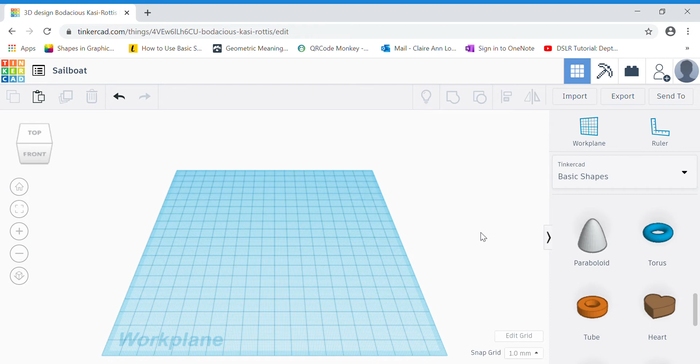Let's get started. First, I'm going to pull out a paraboloid shape. Change the dimensions, we're going to stretch it a bit wider: 30 for the short width and 60 for the length. The height is currently 20, and I'm going to keep that.

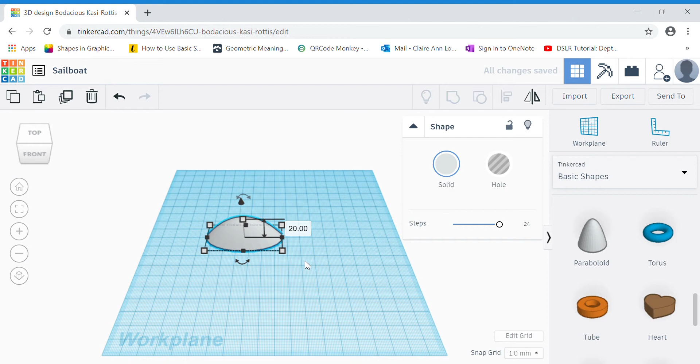What's next is I'm going to flip this shape upside down using my mirror tool. Click the floating arrow, flip upside down. You should see a shape that looks like this. Now this is going to be the hull of our boat, but the bottom is a bit rounded and I'm going to cut it flat.

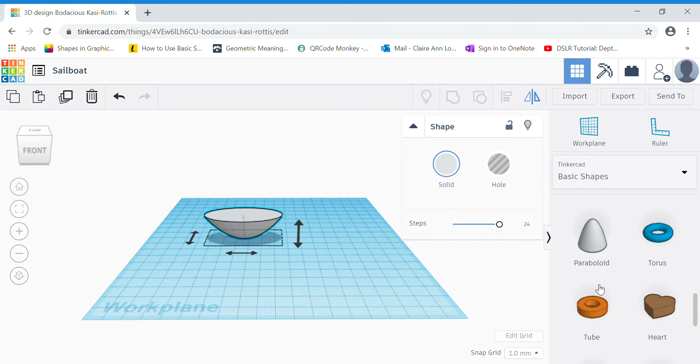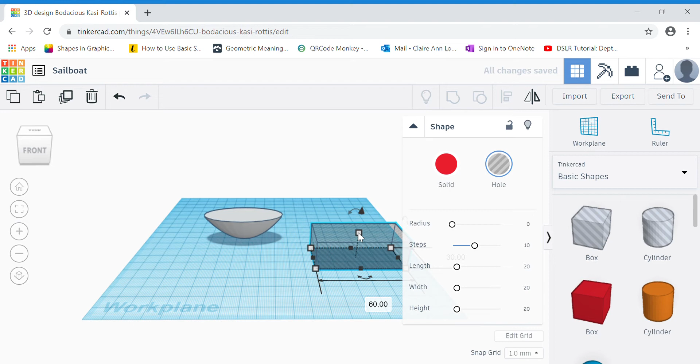To do this, I'm going to pull out a box that is a hole, and change the dimensions for this box. Click the white corner square. I'm going to match that of the paraboloid: short side is 30, long side is 60. But I'm going to make the height a bit shorter, this will be about 5. This is going to be at the bottom of our boat.

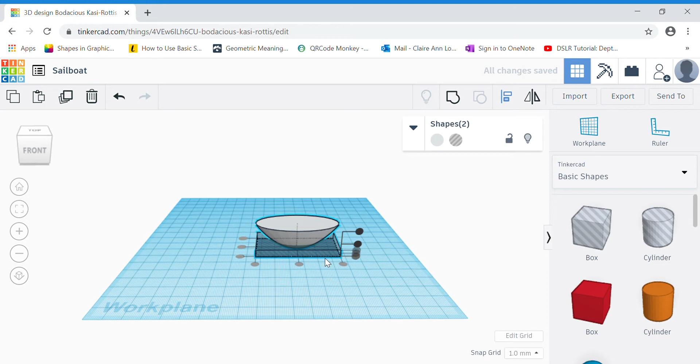Let's align the two shapes together. Drag over, align, middle dot at the side. Your paraboloid should be sitting in the middle of your hole box. Once you're done, immediately do a group, and then you will have cut off the bottom of your paraboloid to get this shape.

As you can see now, our cut paraboloid is floating. We don't want that. We're going to push it using the black cone back to the work plane. This will be a height of 0.

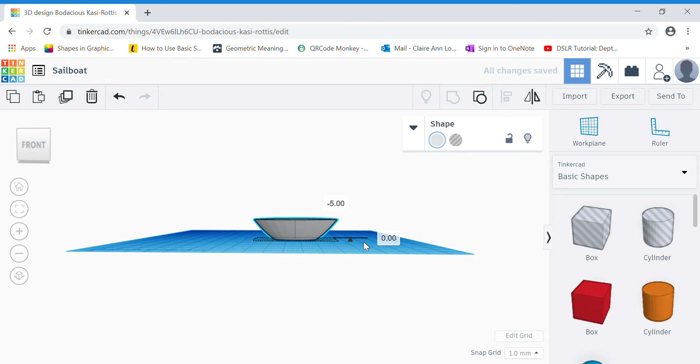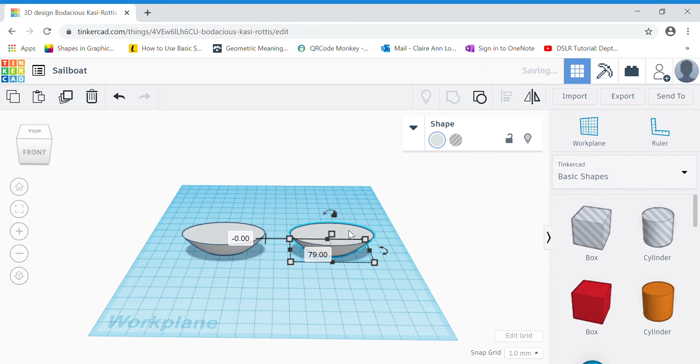Now let's get started to cut out the hole inside our boat hull. For this, I'm just going to shift the paraboloid to the side. I'm going to duplicate this shape and make a smaller paraboloid. Duplicate. You can drag out this paraboloid that's copied. Let's make this one a bit smaller because we're going to cut out a hole.

Dimensions: short side 28, long side 58. The height, I'm going to make it even smaller. Now it's been changed to 15 because we cut off 5 just now. Let's make it 14. Now I'm going to cut this shape into half.

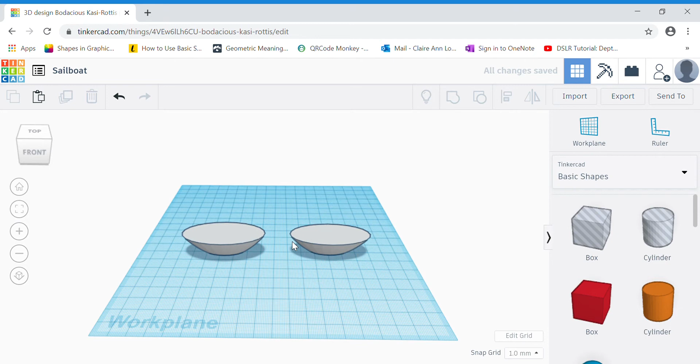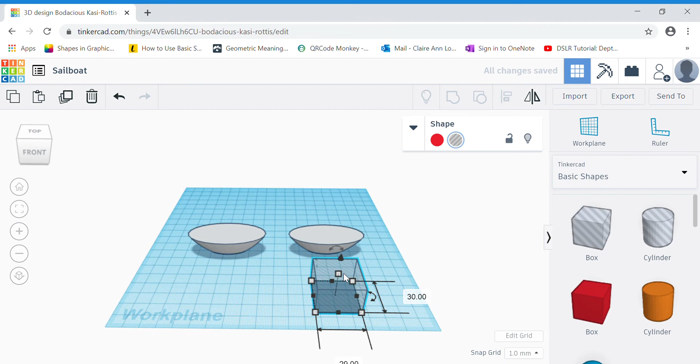So how I do that is I'm going to use another hole box. Change the dimensions, we're going to make this about half of this. The width, let's do about 30. Actually it doesn't matter. The other side we'll do about 29 - it could be 30 as well, so no problem. The height, let's do it a bit taller than the small paraboloid: 15. Now I'm going to push this into half of this paraboloid.

So how I do that is to align both shapes. Align. Instead of pressing the middle dot, I'm going to press the side dot. Click the side dot, now I press the middle dot at the side. I should get something like this. I'm going to cut half of the paraboloid. Once you're done, group.

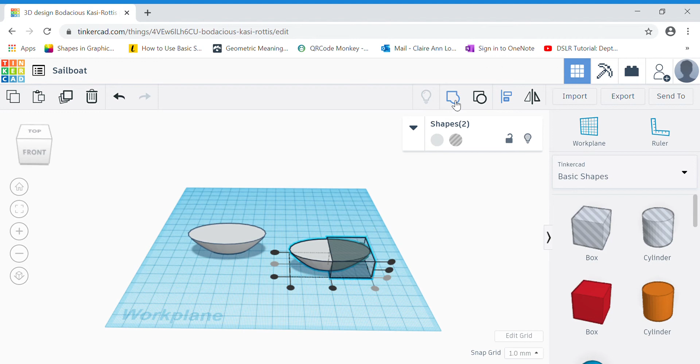When you click your work plane, you should see half of this. Now we're going to change this into a hole. Remember this parabola is smaller, it is not as tall as the previous one - it's about 1 mm difference in height.

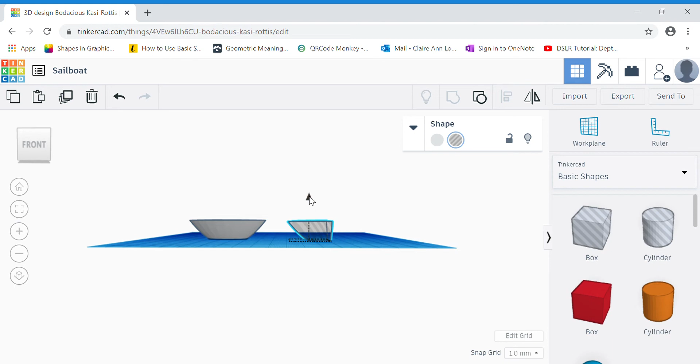So we're going to use the black cone, raise it up to the remaining 1 mm. Now that you're done, use your arrow keys to slowly shift it into the other paraboloid. Make sure it rests right in the middle, like this. Make sure it doesn't pop out of the shape.

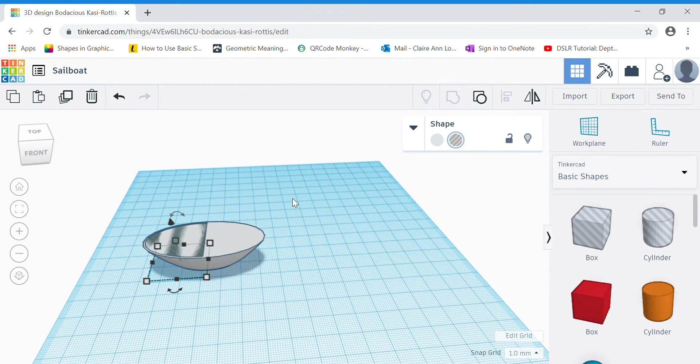Once you're happy with it, select both shapes, do a group. After you wait a while, you should see a very nice hole that's cut into your parabola. This is the completed boat hull. Let's move on to the pole or the mast - for this, you need a cylinder.

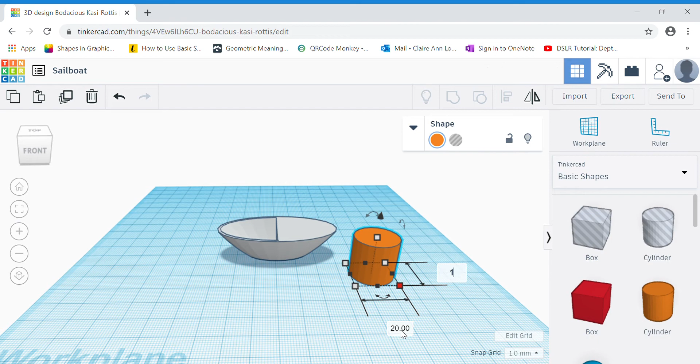Okay, change the dimensions. We are going to make a thin one, so that will be 1 by 1. Okay, height, let's change it a bit longer. We're going to do 70.

Okay, at this point in time, if you want, you can change the shape color. So I'm going to change to a brown. It's up to you what color you want.

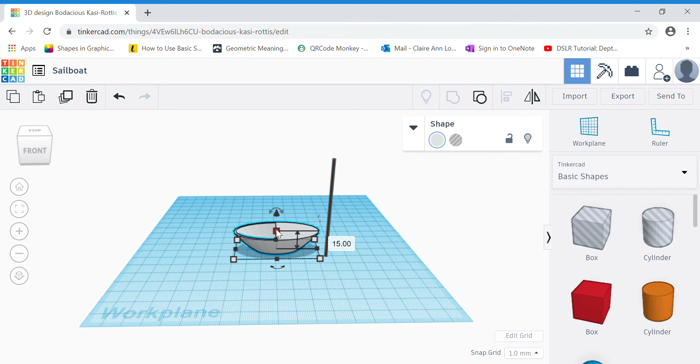Okay, I'm going to put the mast on top of this shape. So this shape is currently sitting at 15mm, so my mast is going to be raised. Use the black cone, raise it to 15 as well.

Okay, then using your arrow keys, just slowly shift it to the center of your boat hull. Make sure it's nicely put in the center. You have to change your view to check.

Okay, now I'm going to do a horizontal boom. So for this, I'm going to use the same cylinder. Duplicate. Alright, my copied shape is already here.

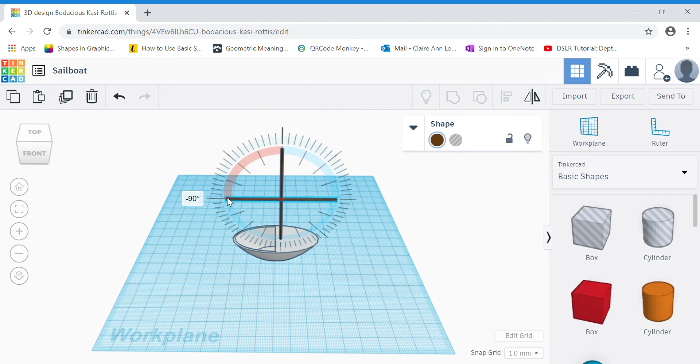I'm going to rotate this way by 90 degrees. Okay, and then I got a really long boom. I don't want that, I just want half. Click the white corner dot, halve it to 35.

Okay, so you should get a very nice half boom here. Now this is a bit tall. We're going to put our sail on top of it.

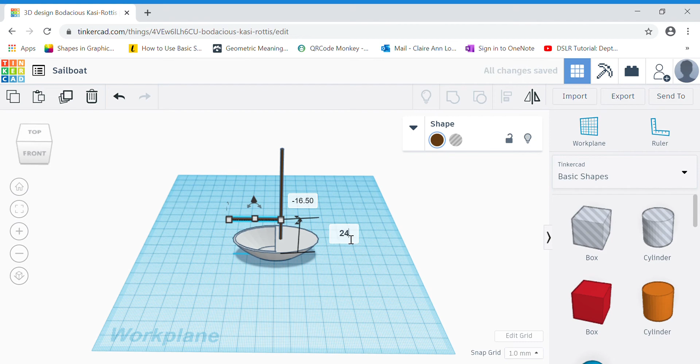So let's push it down to about 24mm high. Okay, so it's going to be a bit lower, so that on top of this we can rest our sail.

Okay, so without further ado, let's move on to the sail. For this, you need a wedge shape.

Move to your work plane. Okay, if you can't really see, you can rotate it now. If not, you can wait and rotate later.

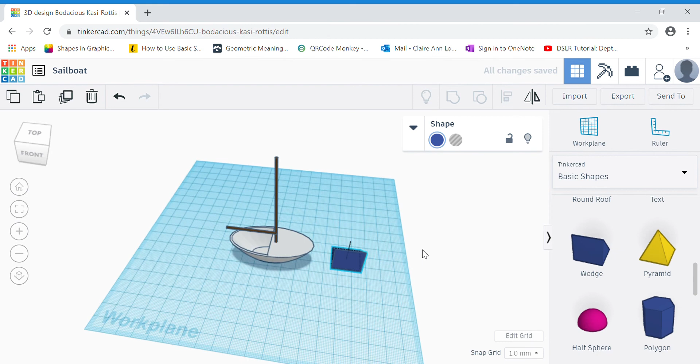Okay, Miss Claire is going to change the height of the sail. This is going to be taller, sitting at about 50mm. Okay, and for dimensions, how wide the sail is, I'm going to make the wideness about 35.

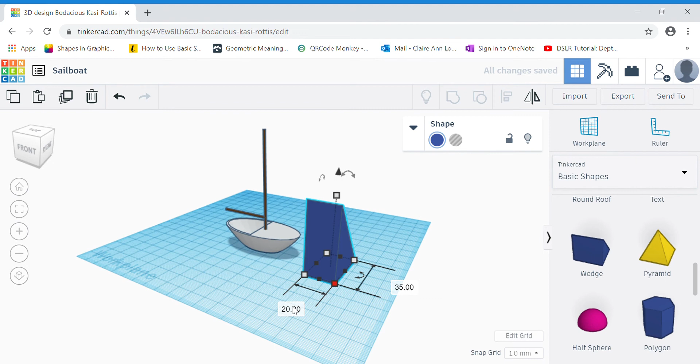Okay, and I don't need the sail to be so thick, so the thickness I'm going to make it about 1. Okay, so with this, thickness is 1, the long side is 35, the height is 50.

Okay, once your sail is done, we are going to rotate this by 90 degrees, so that it's pointing towards your right side of your work plane.

Okay, then we're going to raise it up. Just now my boom was about 24. Okay, so this one we're going to raise up a bit higher to about 25, so it can rest nicely on our boom.

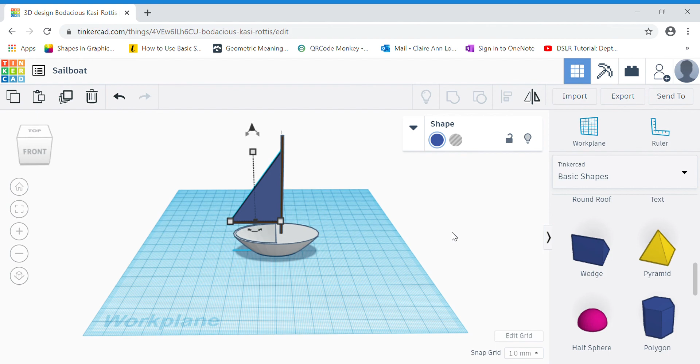Okay, once you're done, use your arrow keys and nicely shift it on top of the boom. It may look nice here, but you will need to rotate your view plane and check. You see, it's popping out.

Make sure it's put nicely. Okay, it should be nice and neat like that.

Alright, once you're done, we are going to duplicate this. Duplicate. Okay, the copied shape is already here. I'm going to flip it horizontally.

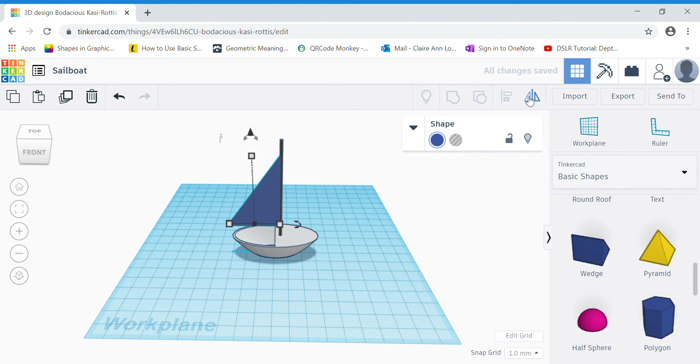Mirror, flip. Okay, now for the short side, I'm going to change the height shorter. Let's make it about 40.

Okay, and once you're done, use your arrow key, your right arrow, to just move it to the other side of the mast. Okay, it should be like a mirror image.

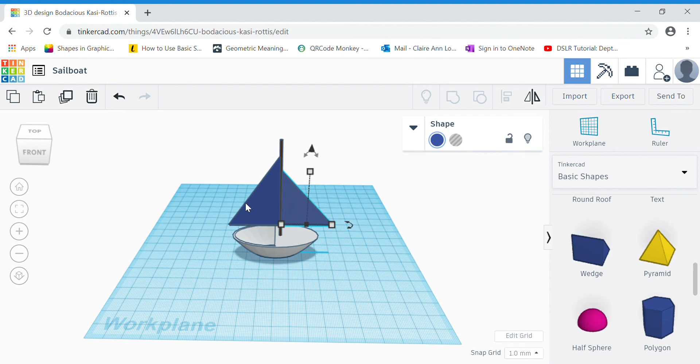Make sure there's no holes. You might have to zoom in to check if there's any holes. Okay, so once you're nice and neat, this is the basic shape of your boat and you're done.

If you want to continue and make the rudder at the side, or you want to modify the sail, please continue to the other steps in your work system.